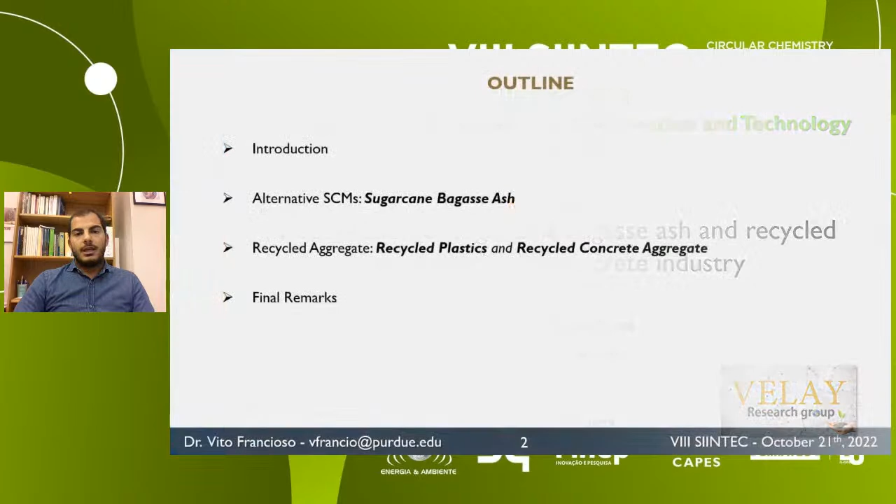Of course, there is not much time to talk about everything that I did during my PhD. I will just talk about 3 studies, but let me know, interrupt me anytime, ask me questions if something is not clear. So this is the outline for today's presentation. I will give a brief introduction, and then we will see the utilization of sugarcane bagasse, and then recycled aggregate, recycled plastics, and recycled concrete aggregate, and then some final remarks.

Cementitious materials are indispensable to our social and economic development. Concrete is perhaps the most eco-friendly, versatile, low-cost, and durable construction material. Its embodied carbon is 10 to 20 times lower than that of glass and steel. So where does the environmental impact come from? Well, with over 30 billion tons of global annual production, concrete is the most used artificial material in the world.

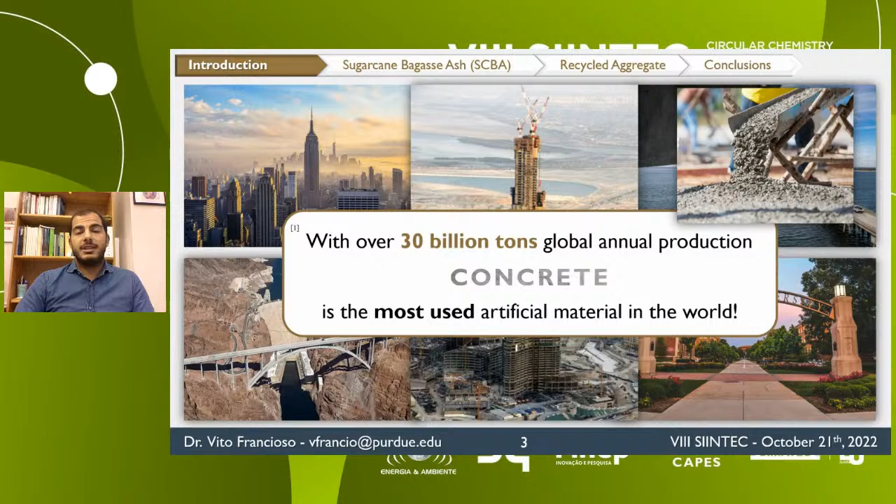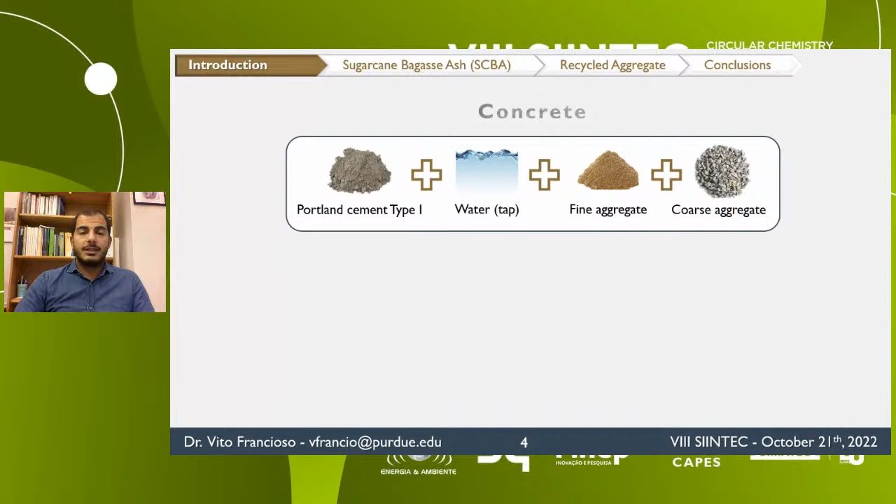Concrete is a composite material made by mixing together cement, water, and aggregate. A significant contribution to the impact that the construction sector has on the environment is due to the cement industry. In fact, the production of cement is responsible for 8% of the global CO2 emissions. This comes from the fuel necessary for the production of the clinker, for the calcium carbonate decomposition, and also for the transport. Besides cement, aggregates have a great impact on the sustainability of construction, since they represent around 60 to 70% of the volume of the concrete.

Each year, approximately 8 billion cubic meters of aggregates are used in constructions, and the majority of them come from raw materials, consequently contributing to the depletion of natural resources.

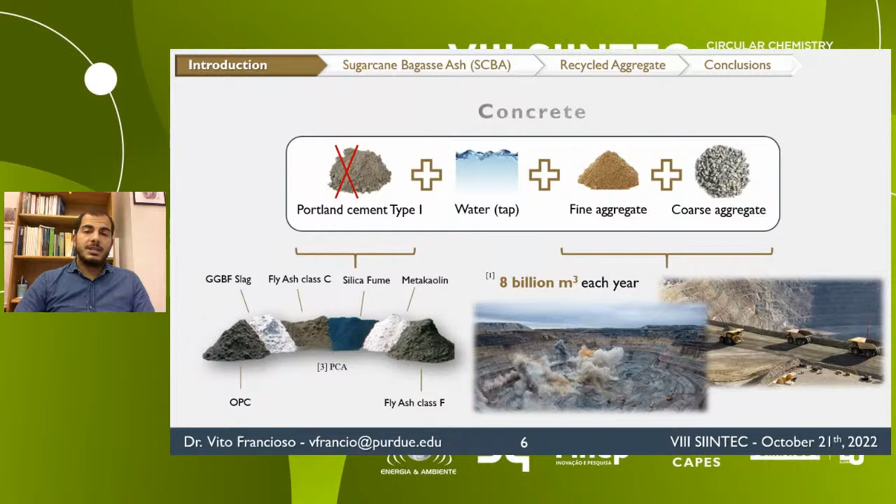Now, there are different approaches to reduce the environmental impact of cementitious materials. One approach is reducing the cement content, for instance, substituting it with supplementary cementitious materials. SCMs are natural materials or industry byproducts used as admixtures in concrete to make up part of the cementitious component.

Another approach is replacing natural aggregate with recycled aggregates, such as recycled concrete aggregate and recycled plastic, which can contribute to reducing both the natural abiotic depletion and waste generation.

Furthermore, we could improve the sustainability of the cementitious composite, enhancing their durability and providing the material advanced properties that may have a positive proactive effect during service life. For example, titanium dioxide nanoparticles have been found to provide cementitious composites with photocatalytic properties that may reduce different pollutants concentration from the environment while enhancing their strength.

I won't be able to talk about the titanium dioxide today, but we have used it in many of our studies, and we have used it in conjunction with recycled concrete aggregate as well.

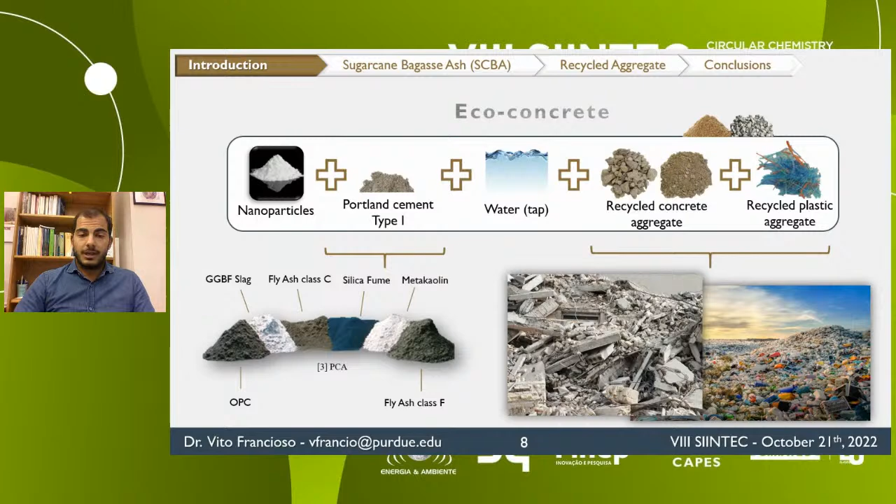So we have seen that there exist different approaches, but how do they work synergistically? For example, if I replace natural aggregate with a recycled aggregate, how will their performance change?

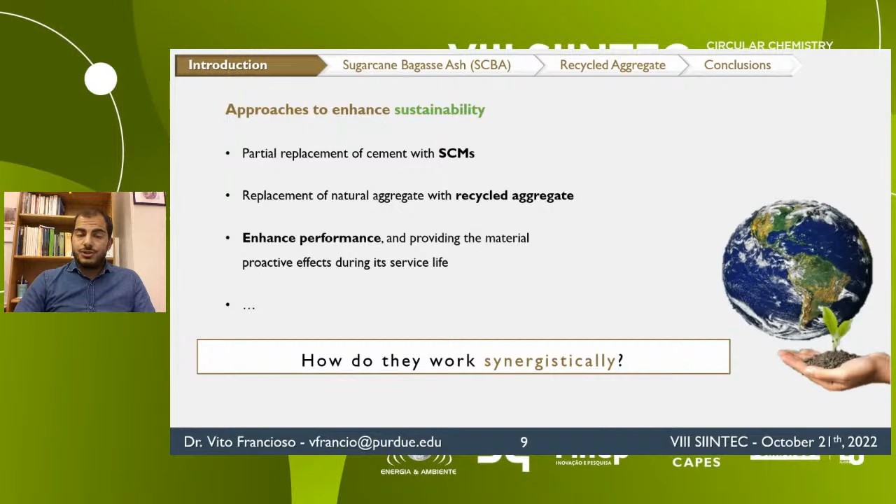These slides summarize the studies that I will be presenting today. I will discuss first the utilization of sugarcane bagasse ash and how curing temperature can change the environmental impact in mortars. Then I will be assessing the impact of recycled plastics on the high temperature resistance of mortars. And finally, I will evaluate the influence of the ambient condition on the thermal conductivity of composites that contain recycled concrete aggregates. For each of these studies, I will make a brief introduction and then explain my motivation and provide my hypothesis for the studies.

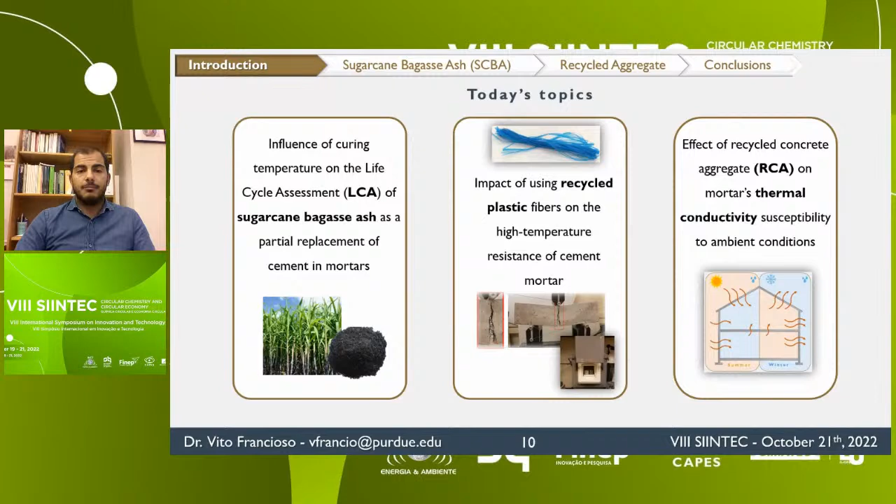So let's start with the first study, the influence of curing temperature on the life cycle assessment of sugarcane bagasse ash as a partial replacement of cement in mortars. This research has been submitted in a paper this month, so it's very fresh.

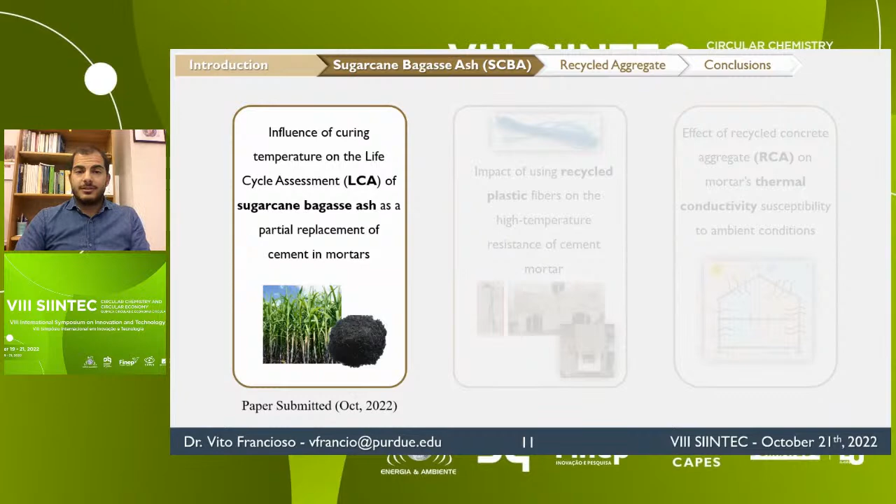Now, currently, one of the most used supplementary cementitious materials is coal fly ash, a byproduct generated in power plants. However, fly ash may become a limited resource due to the dismantling of coal-based power plants in developed countries. Thus, there is a need to find new products that can replace the fly ash in concrete production to lower the amount of cement and its corresponding CO2 emissions.

Recent attention has been shifted to the utilization of sugarcane biomass ashes. An example of these biomass ashes is sugarcane bagasse ash, which is a biomass waste resulting from sugarcane bagasse combustion for electricity production. Sugarcane bagasse is a byproduct of the sugarcane industry in sugar and ethanol production.

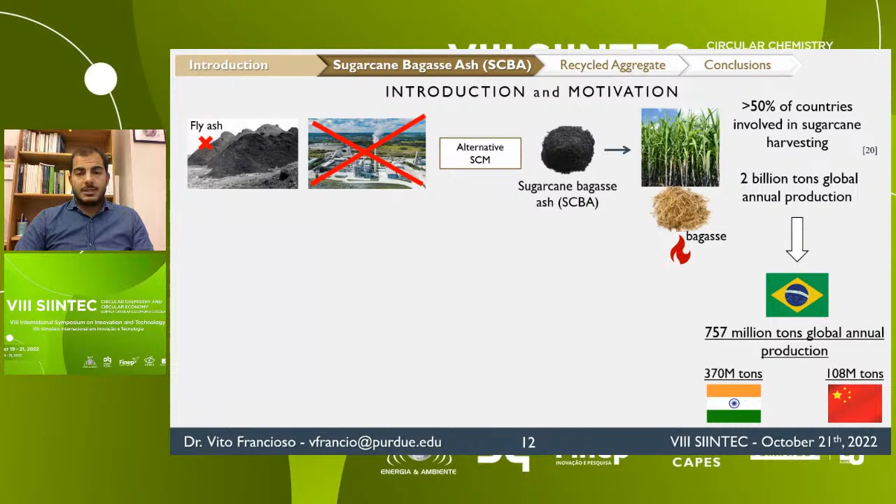More than 50% of the countries are involved with sugarcane crops, totaling an annual global production of about 2 billion metric tons, with Brazil being the world's undisputed leader with 757 million tons of sugarcane production in 2020, followed by India with 370 million tons, and China.

Now, as the production increases, the amount of ashes generated will also increase, contributing to the ongoing issue of biomass waste management. These ashes are often disposed of in landfills without any regulation and control. However, research has demonstrated that they can be used as a partial cement replacement for the production of mortars and concrete with acceptable strength and durability, which may also increase the sustainability.

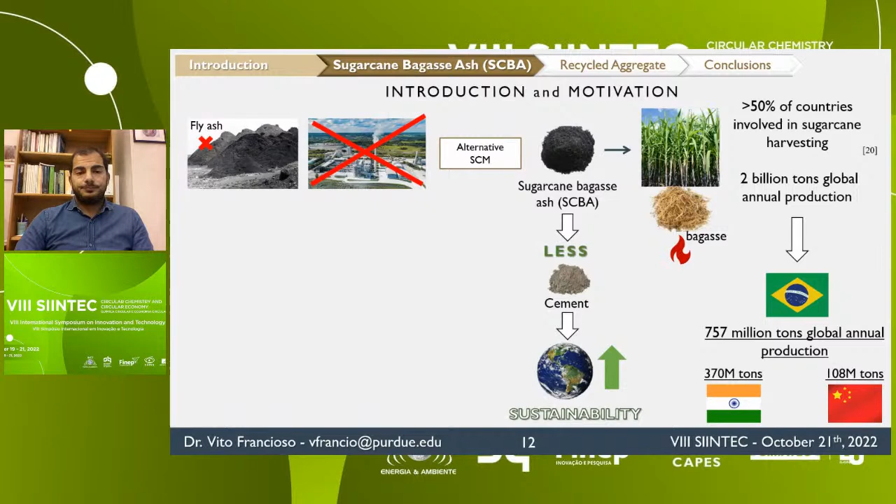Previous studies show that curing temperature influences the effect that biomass ashes have on compressive strength of cementitious composites. If the temperature changes the effect of these ashes on strength, the cement content needed to achieve a given performance will also change. Then, what are the real savings of using bagasse ash, or biomass ash, in terms of cement reduction as a function of the curing temperature, right?

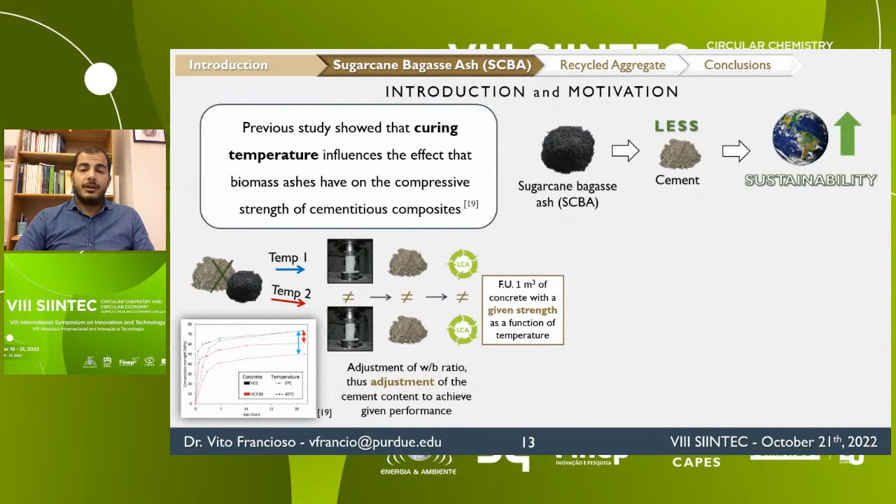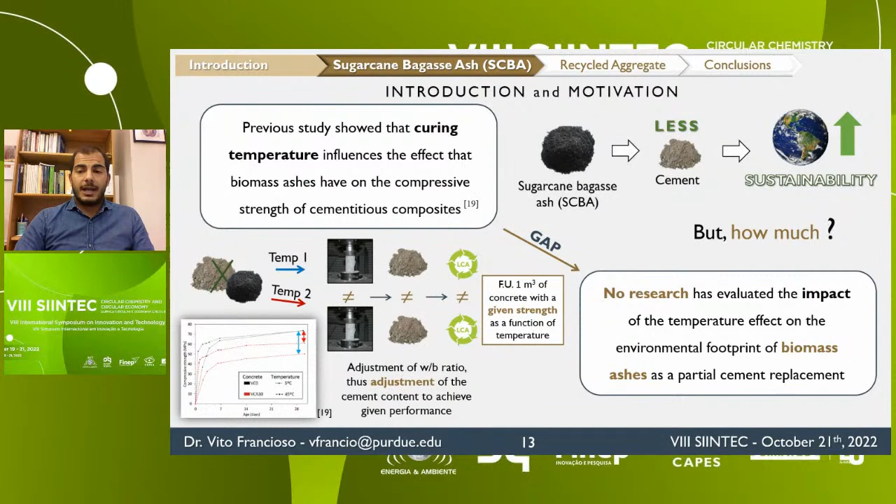We need to compare the samples with the same performance to make a fair comparison. So we realized that no studies evaluated before the impact of the curing temperature on the environmental footprint of using bagasse ashes on cementitious composite.

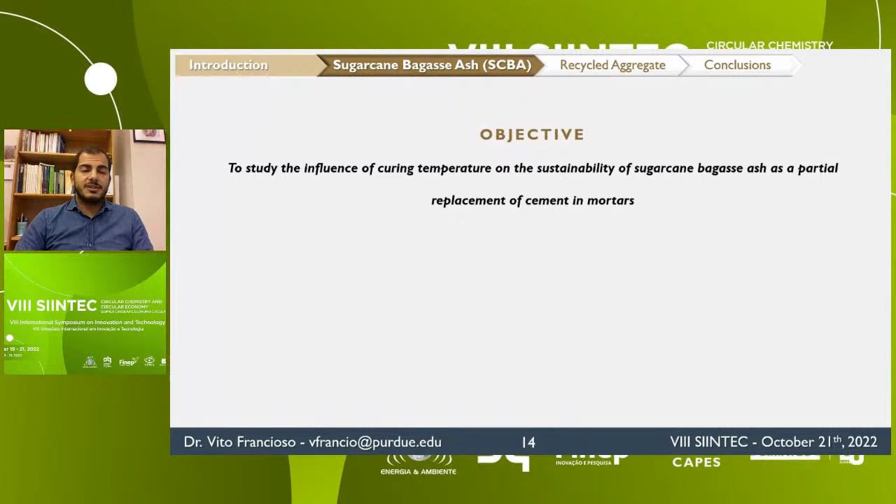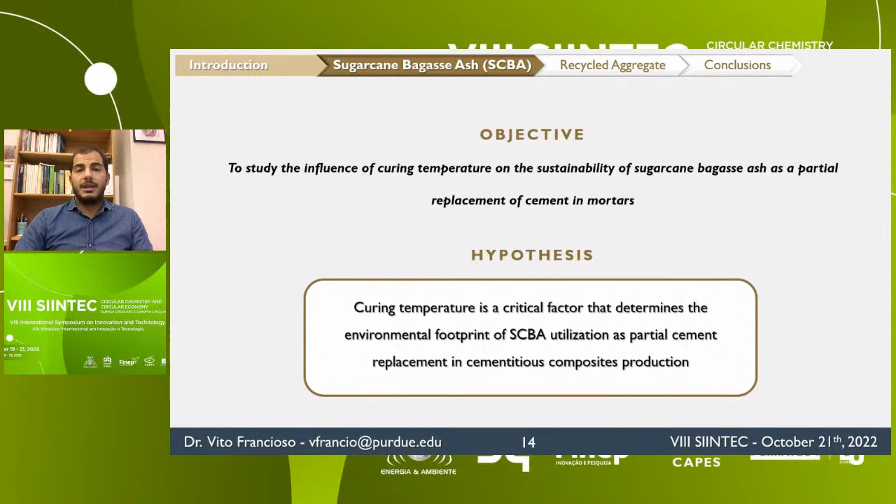The objective of this research was to study the influence of curing temperature on the sustainability of sugarcane bagasse ash as a partial replacement of cement in mortars. My hypothesis is that curing temperature is a critical factor that determines the environmental footprint of sugarcane bagasse ash utilization as a partial replacement in cementitious composite production.

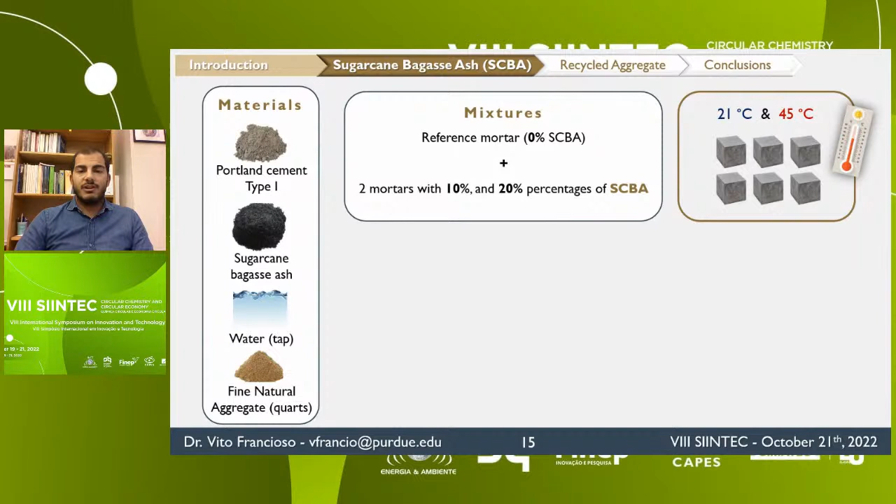For these studies, I designed 3 mixtures: a reference mixture without sugarcane bagasse ash, and 2 mortars with 10% and 20% replacement of cement with sugarcane bagasse ash. These percentages were based on previous research, while the curing temperatures chosen were 21 degrees Celsius and 45 degrees Celsius. For the experimental campaign, I performed compressive strength tests, physical and chemical characterization of the ashes, and finally a life cycle assessment.

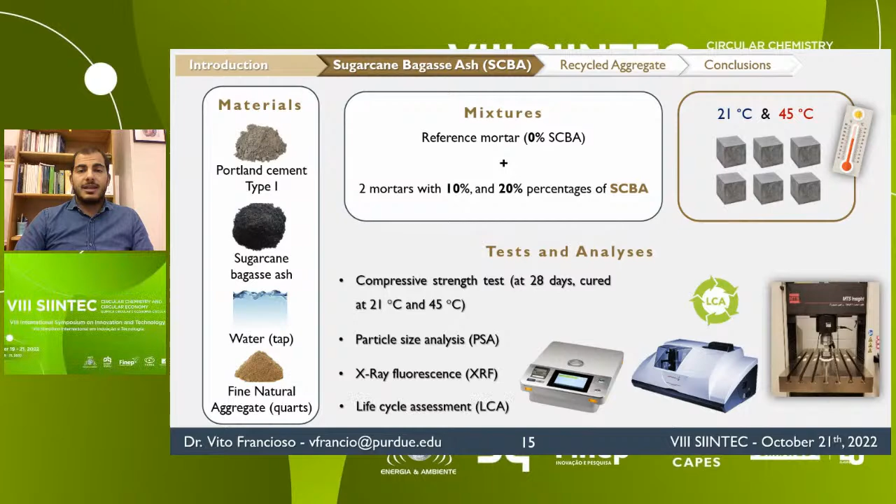Results show that the replacement of cement with sugarcane bagasse ash at standard curing temperature, 21 degrees Celsius, had a slightly negative effect on the compressive strength. Nevertheless, the difference compared to the reference mortar cured at the same temperature was lower than 8% in both replacements, 10 and 20%.

However, when the samples were cured at a higher temperature, the mortars with sugarcane bagasse ash exhibited an increase in compressive strength, over 20% in both cases compared to the plain mortar cured at the same temperature. Thus, the results suggest that the curing temperature modifies the effect of sugarcane bagasse ash on the mortar's compressive strength.

From here, I performed a secondary experimental campaign to estimate the variation of cement content required to obtain a compressive strength equal to that of the reference mortar without sugarcane bagasse ash, depending on the ash replacement level. The results of this additional experimental campaign contributed as an input for the life cycle assessment.

What is a life cycle assessment? LCA is a tool for evaluating the environmental impact associated with a product system throughout its life cycle, and it can be divided into 4 steps.

The first step is the goal and scope definition. The scope of this life cycle assessment was to quantify how curing temperature affects the environmental performance of eco-mortars with different percentages of sugarcane bagasse ash. The system boundary chosen for this study was cradle to gate, from production to the point the material is sold. The functional unit chosen was 1 cubic meter of mortar with the same compressive strength as the reference mixture, the mixture with plain Portland cement and without ashes, cured at the same curing temperature.

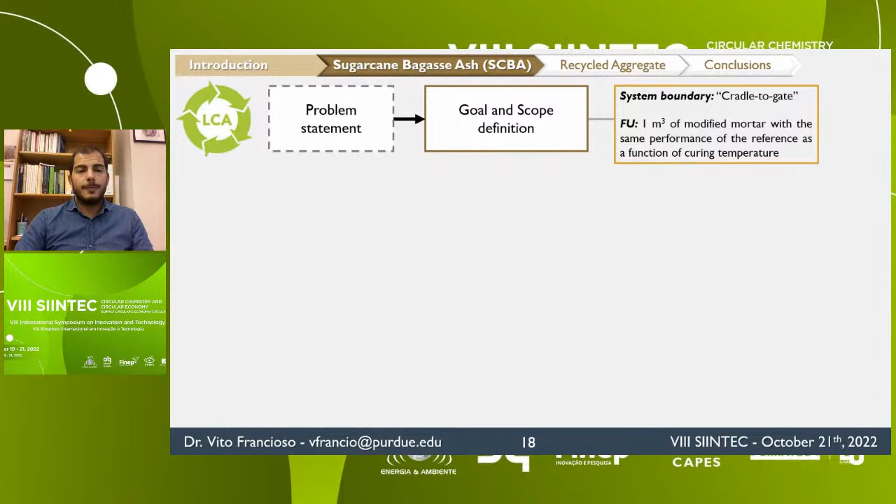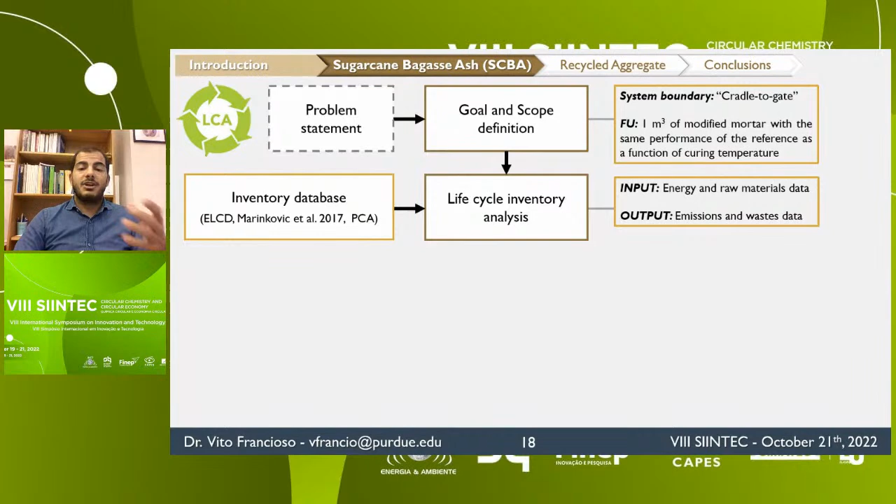The second step in the life cycle assessment is the life cycle inventory. In this stage, input and output data must be identified and allocated for each material production. To help with this, numerous databases have been developed which provide essential inventory data representing the average production and supply conditions for products and services.

The last phase of the LCA is the interpretation of the results obtained from the impact assessment. For these studies, I followed two different approaches: I analyzed the single impact categories, and I also used normalization factors to obtain a single unified index comprising all impact categories.

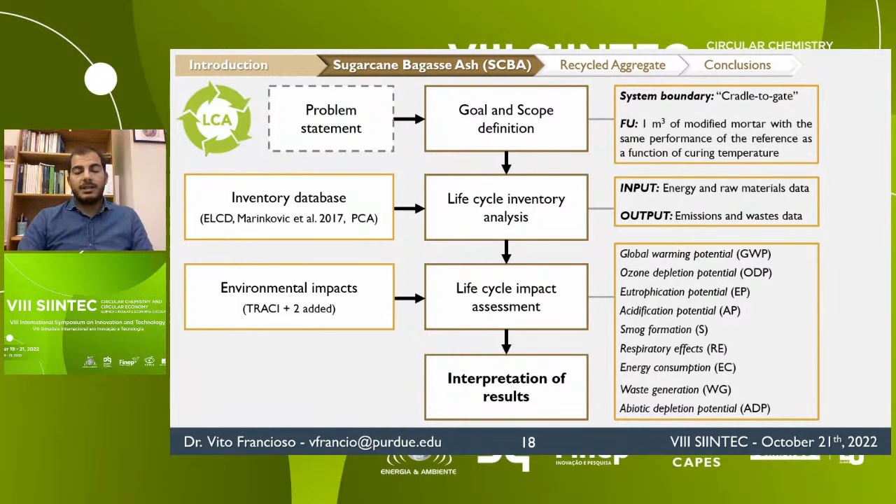The results show that a replacement of about 100 kilograms of cement with sugarcane bagasse ash per cubic meter of mortar produces over 2 times higher reduction in environmental impacts when the curing temperature is 45 degrees, compared to when the curing temperature is lower.

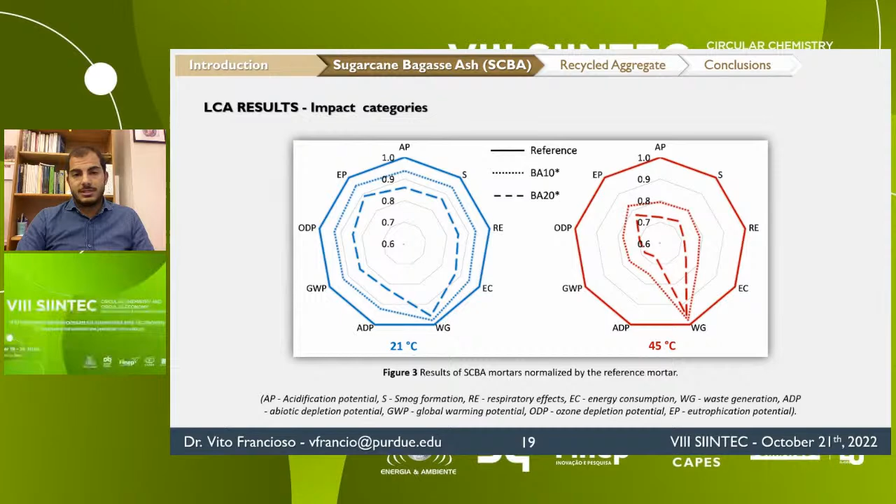The results can also be represented with a single normalized unified index, which accounts for all the impact categories in a single score that is then normalized to its reference. To do this, we use normalization factors, which put each environmental impact in relation to the impacts of society's production and consumption activities.

The results clearly showed that curing temperature is critical when assessing the environmental impact of mortars containing sugarcane bagasse ash. In the case of 20% replacement, the reduction compared to the reference mortar was 14% at 21 degrees and 31% at 45 degrees, more than double.

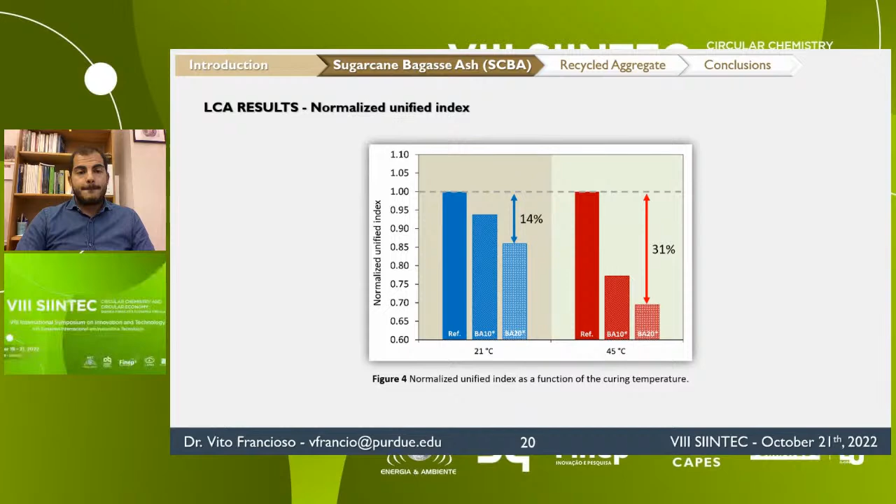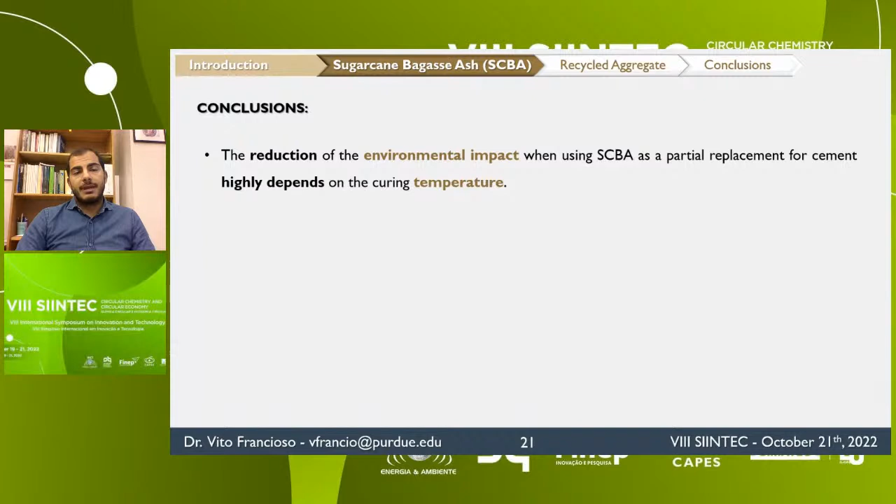We can conclude that the reduction of the environmental impact when using sugarcane bagasse ash as a partial replacement for cement highly depends on the curing temperature. When mortars were cured at 45 degrees Celsius, the use of sugarcane bagasse ash reduced the environmental impact 2 times with respect to the reduction at 21 degrees Celsius.

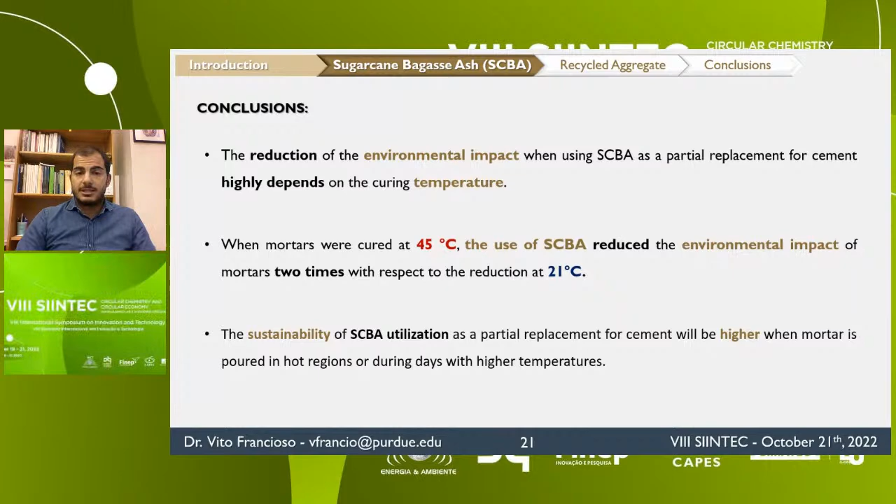The sustainability of sugarcane bagasse ash utilization as a partial replacement of cement will be higher when the mortar is poured in a hot region or during days with higher temperature. Therefore, external curing temperature is an important factor that should be considered when the sustainability of cementitious composites containing sugarcane bagasse ash, but also other biomass ashes, is assessed.

Now let's see some utilization of recycled plastic in cementitious composites, in cementitious materials. This research has been published in the Construction and Building Materials Journal in 2021.

Previous studies have shown that the performance of cementitious composites reinforced with plastic fibers can be enhanced, including its mechanical properties and durability. The plastic fibers can act as a reinforcement and produce a bridging force across the cracks that prevents their propagation. Because of these fibers bridging cracks in the matrix, fiber-reinforced mortars may exhibit significantly higher flexural strength than plain mortar.

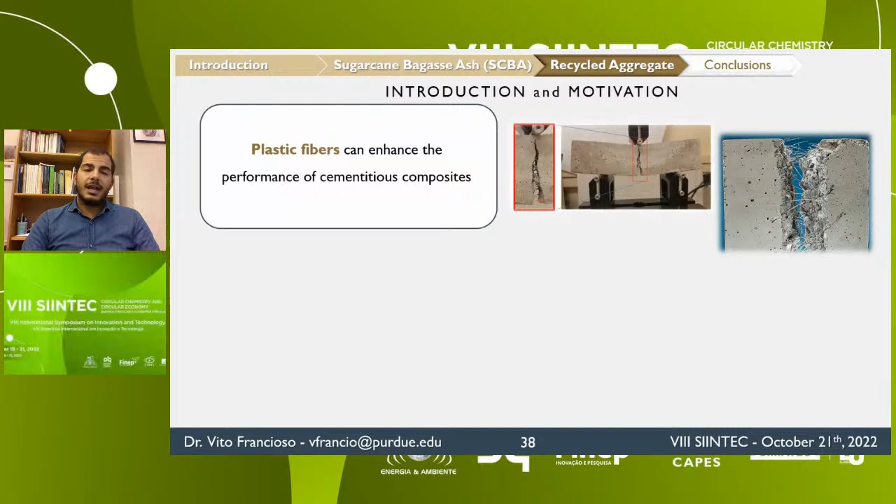Compared to other options such as steel fibers, plastic fibers have a lower carbon footprint, are cost-effective and corrosion-resistant. However, the effect on strength has been reported to be contradictory. It's been observed that the interfacial transition zone (ITZ) between the matrix and the plastic fibers is affected by the smooth surface and hydrophobic nature of the plastic, resulting in poor anchoring.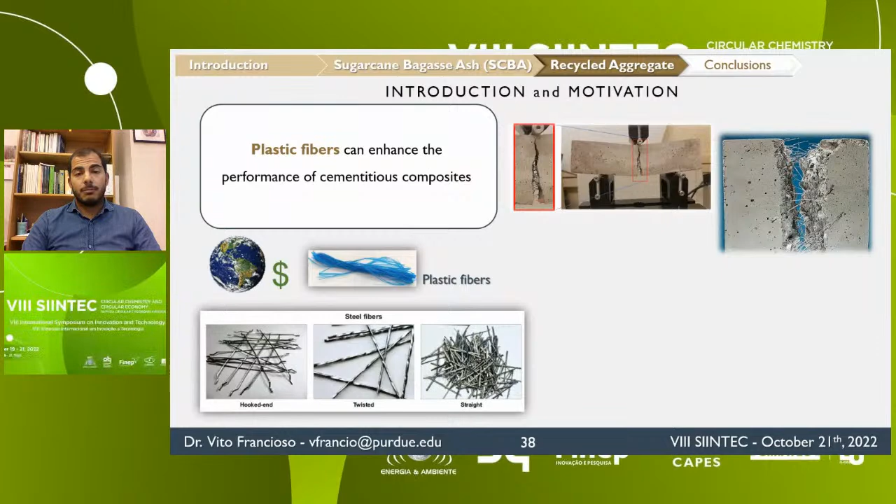Several studies have demonstrated that polypropylene fibers can prevent spalling failure of concrete under compressive loads caused by internal stresses when subjected to elevated temperature. However, the influence of elevated temperature on the flexural performance of recycled plastic fiber reinforced mortars, and its effect on the interfacial transition zone between the matrix and the recycled fibers, was not deeply investigated.

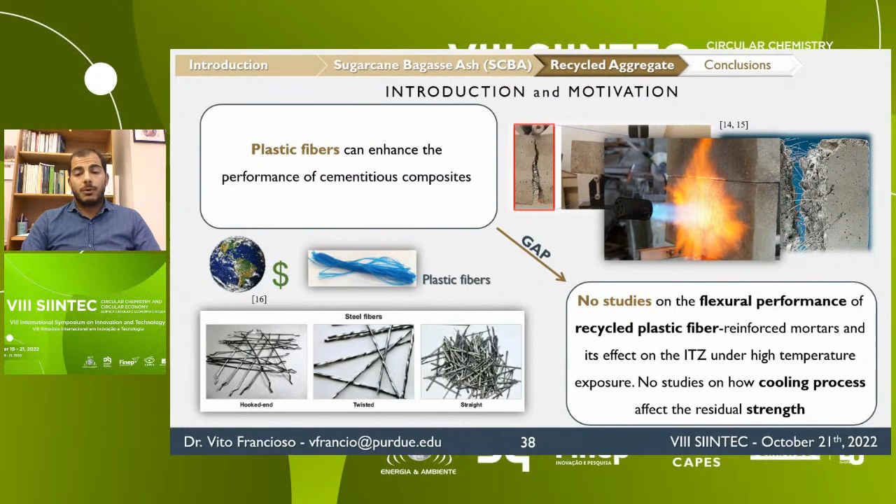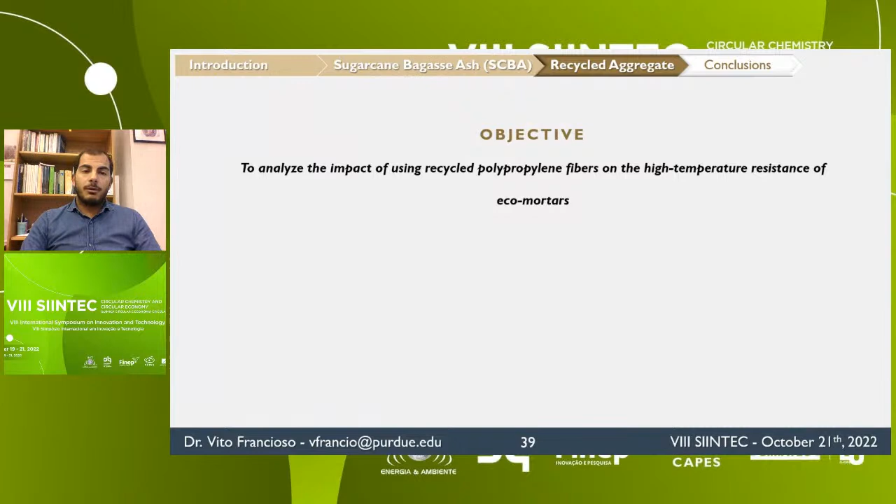Moreover, no studies were found on the possible effects of cooling processes on the residual strength of these eco-mortars. The objective of this study was to analyze the impact of using recycled polypropylene fibers on the high temperature resistance of eco-mortars. My hypothesis is that exposure to elevated temperature will affect the interfacial transition zone bonding between the matrix and the recycled fibers, impacting the residual strength of the eco-mortars once cooled down.

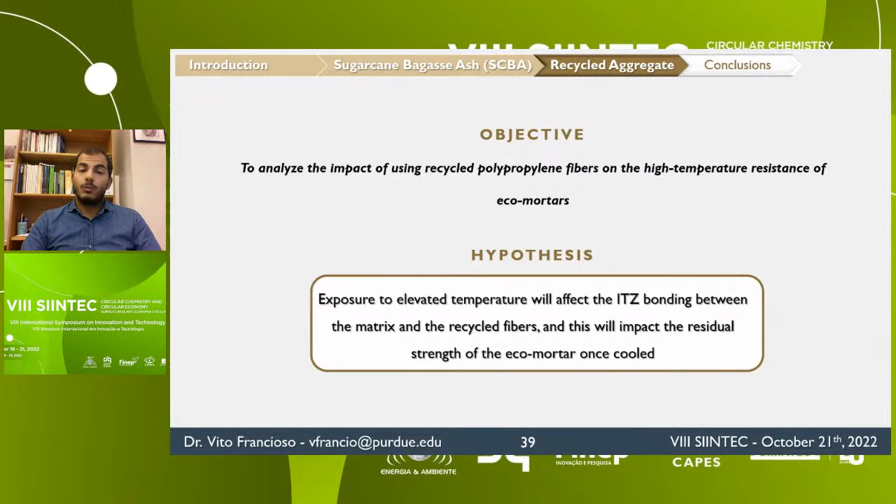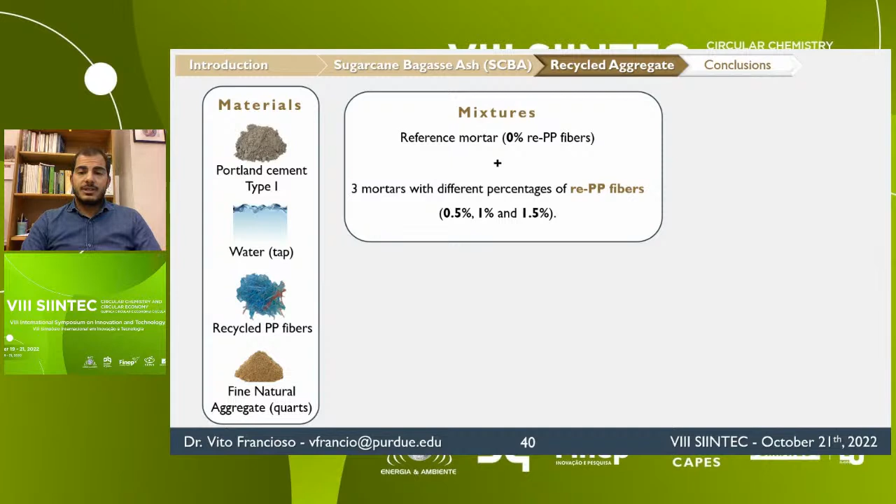For this study, I designed 4 mixtures: a reference one without any fibers, and 3 mortars with different percentages of recycled polypropylene fibers: 0.5%, 1%, and 1.5%. The flexural and compressive strength tests were performed at 28 days before and after exposure to elevated temperatures.

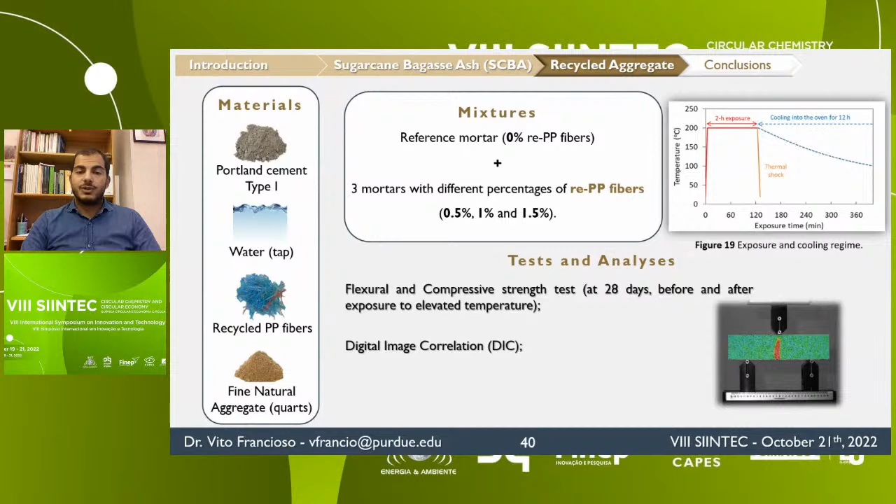Besides, digital image correlation (DIC) technique was adopted to study the evolution of crack propagation and strain distribution in the specimen during the 3-point bending test. Finally, the interfacial transition zone was inspected by means of a digital optical microscope.

The samples were exposed for 2 hours at 200 degrees Celsius, and then tested after 2 different cooling regimes: thermal shock, meaning the samples were tested right after the 2 hour exposure, and then after 12 hours cooling in the oven.

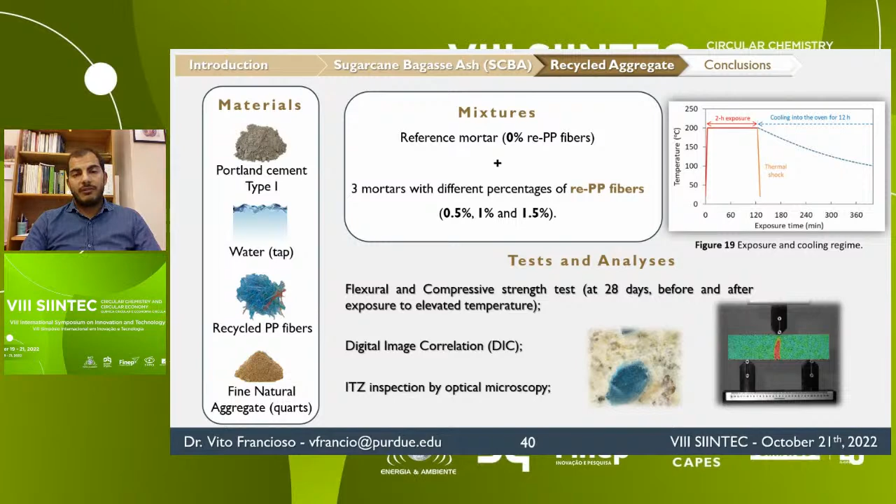On the other hand, slow cooling increased the flexural strength compared to samples tested under standard conditions. This enhancement is specifically higher in samples with polypropylene fibers. Since the matrix is the same, these results suggest that the bonding between the fibers and the matrix was enhanced after the high temperature exposure of slow cooling.

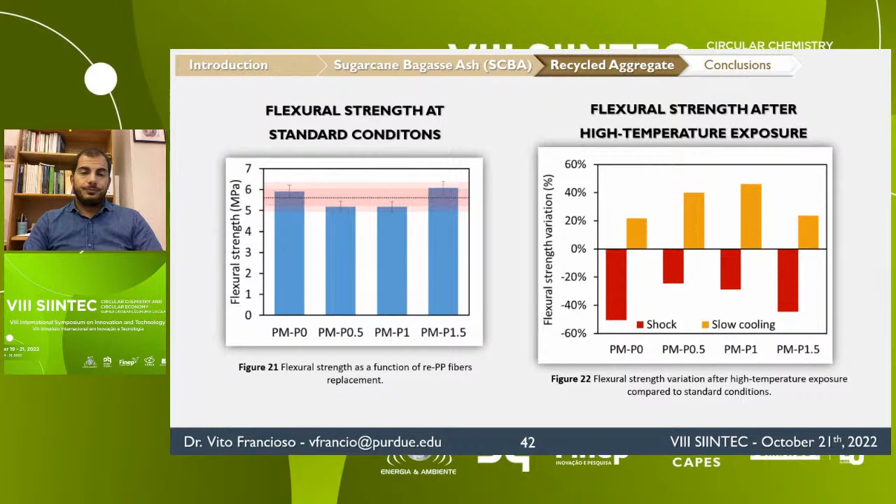Even though the recycled fibers did not remarkably affect the flexural strength, they have been found to increase the maximum strain before ultimate failure and provided the composite material a secondary flexural strength. So to evaluate the influence of exposure on the fiber bonding, I analyzed this secondary strength, since this strength is only related to the amount of fibers and the bonding between the fibers and the matrix.

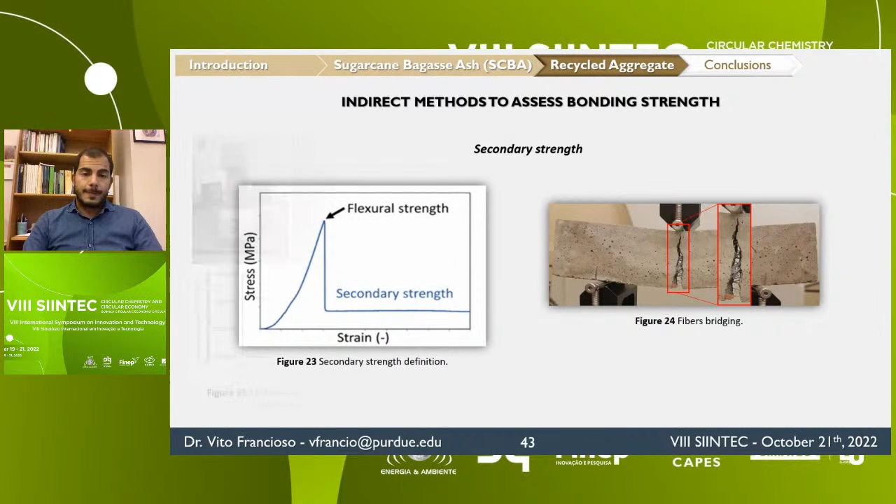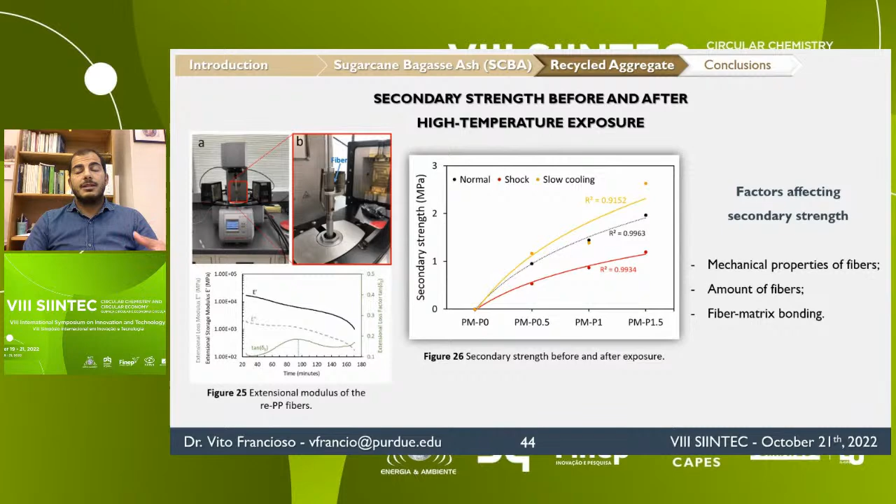Nevertheless, in samples tested after slow cooling, the fibers could recover all their strength and contribute again to the strength of the composite. Not only that, it improved, suggesting an improvement in the fiber matrix bond.

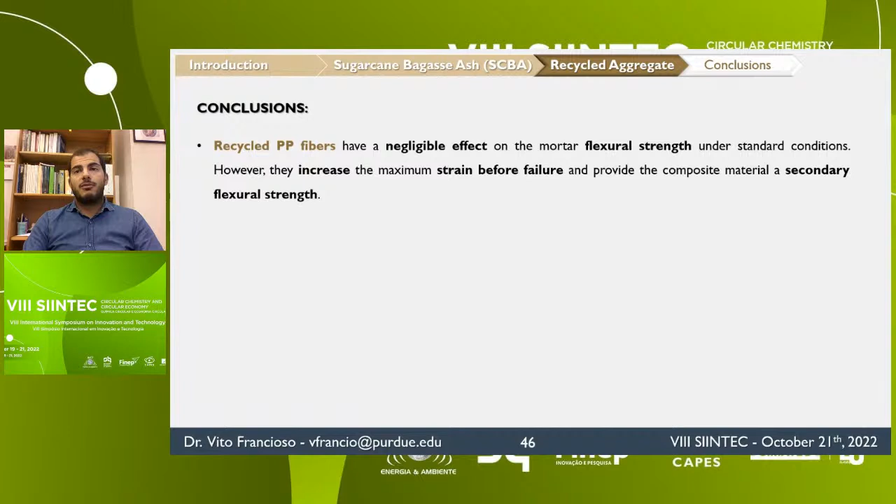So we can then conclude that the recycled polypropylene fibers have a negligible effect on the mortar flexural strength under standard conditions. However, they increase the maximum strain before failure and provide the composite material a secondary flexural strength.

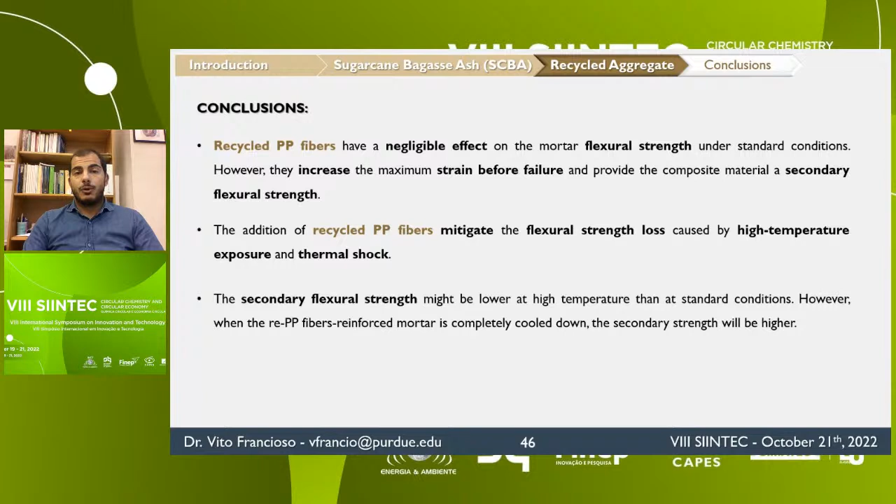The addition of recycled polypropylene fibers mitigates the flexural strength loss caused by high temperature exposure and thermal shock. The secondary flexural strength might be lower at high temperature than at standard condition. However, when the recycled polypropylene fiber reinforced mortar is completely cooled down, the secondary strength will be higher.

And finally, after 200 degrees Celsius temperature exposure for 2 hours, the polypropylene fibers can penetrate the pore network, enhancing the adhesion between the fibers and the mortar matrix after they are cooled down.

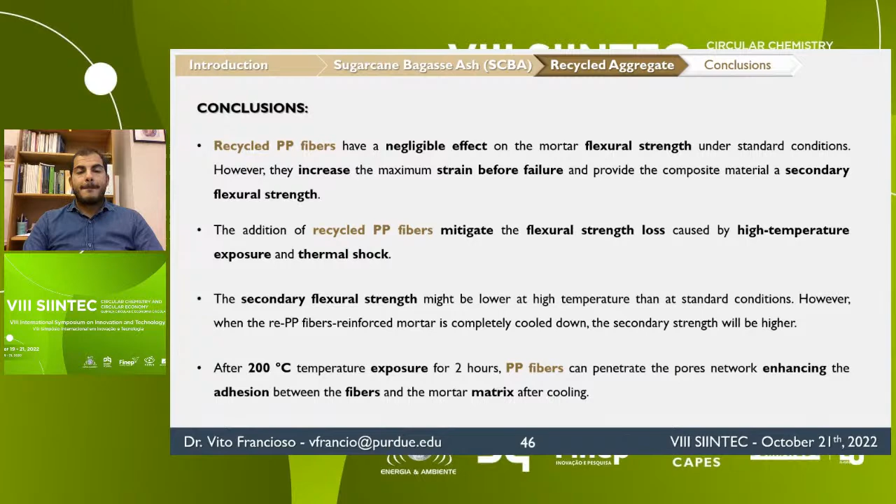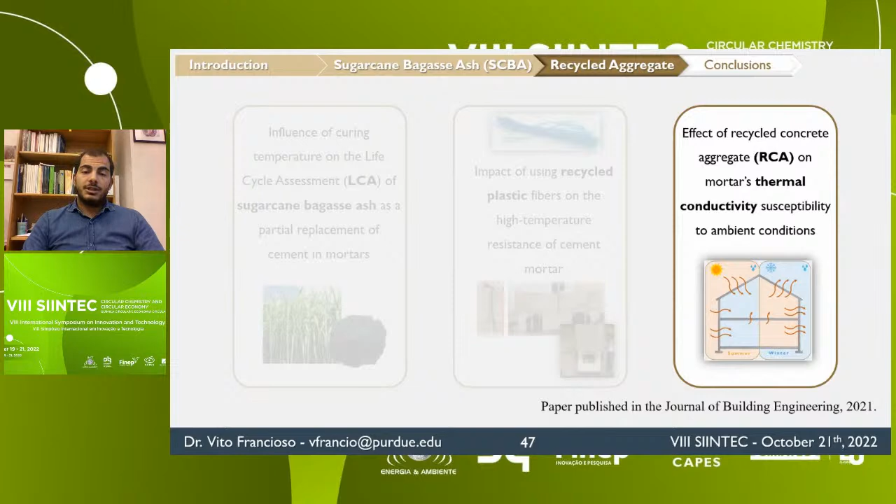Finally, we are going to see the effect of recycled concrete aggregate on the mortar's thermal conductivity susceptibility to ambient conditions. This research has also been published in the Journal of Building Engineering in 2021.

Now, the building and construction sector is responsible for 39% of the global energy-related carbon emissions. 28% of this comes from building operation, HVAC, and power. Therefore, enhancing the thermal insulation capacity of cementitious composites used in building construction might reduce the energy consumption of buildings during their service life.

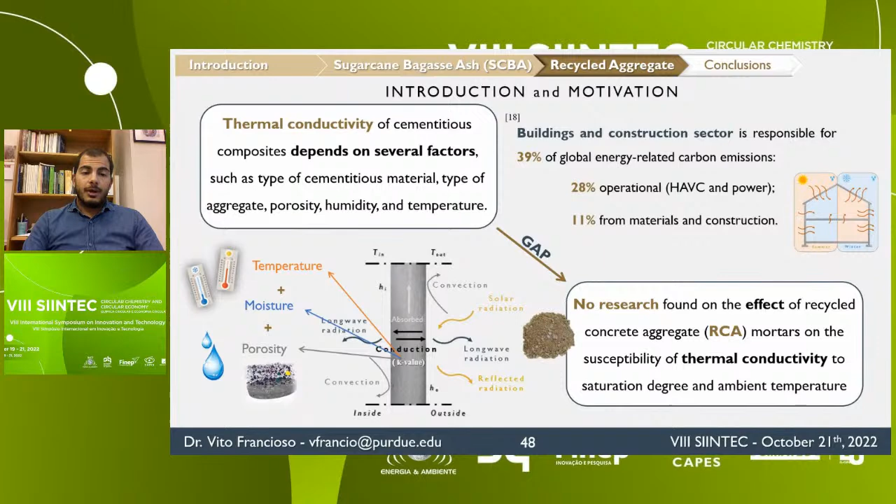It is known that the thermal conductivity can be reduced by replacing natural aggregate with recycled concrete aggregate, which has a lower thermal conductivity. However, no research was found on the effect of recycled concrete aggregate on the susceptibility of the thermal conductivity to saturation degree and ambient temperature.

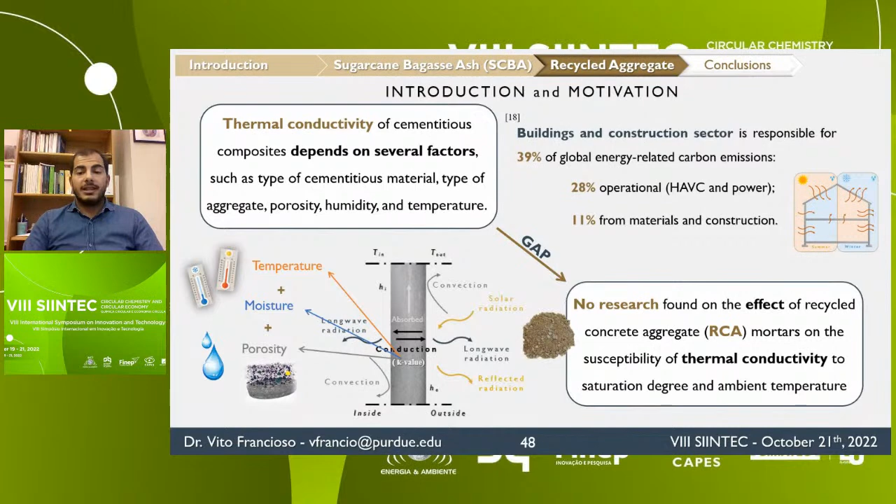Why is it important? It is important because understanding these effects is crucial to assess the actual environmental impact during the service life as a part of the building component.

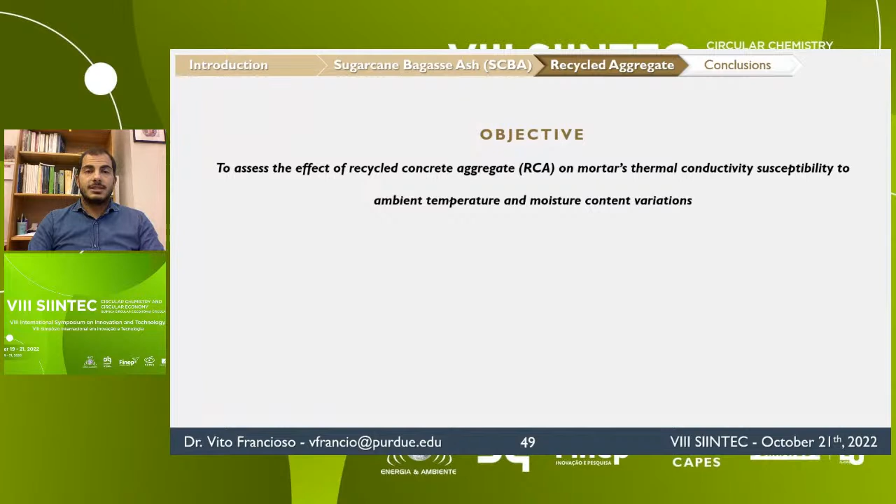So the objective of this study was to assess the effect of recycled concrete aggregate on mortar's thermal conductivity susceptibility to ambient temperature and moisture content variation.

The hypothesis is that the higher porosity due to the utilization of recycled concrete aggregate may change the susceptibility of thermal conductivity of the recycled composite exposed to different ambient temperatures.

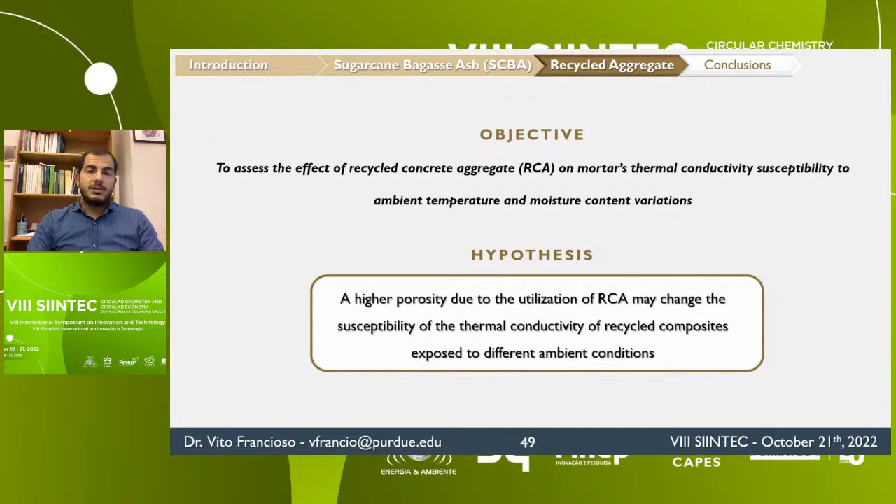Here I designed 4 mixtures with 0, 25, 50, and 100% of recycled concrete aggregate. However, only 3 of them were selected for assessing the thermal conductivity, while the other one, the 25% replacement, was used to validate the model that I will present later.

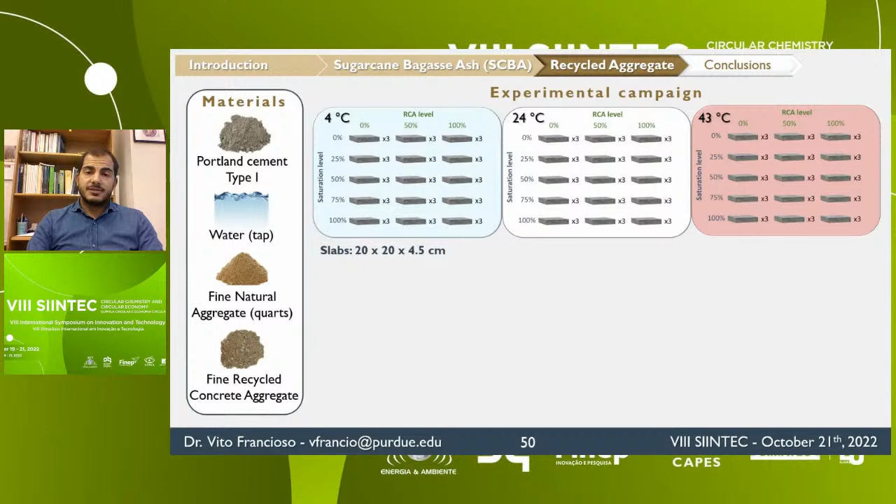So prismatic specimens were cast for flexural strength and compressive strength tests, and slab specimens were cast for thermal conductivity evaluation. A total of 135 thermal conductivity tests were performed here.

Each sample was tested at 3 different ambient temperatures, 4, 24, and 43 degrees Celsius, as per the RILEM standard. Also, 5 different saturation degrees were studied, from dry to fully saturated condition.

The density and the permeable porosity were also determined, and finally I developed an equation which allows obtaining the thermal conductivity as a function of different variables that we will see later.

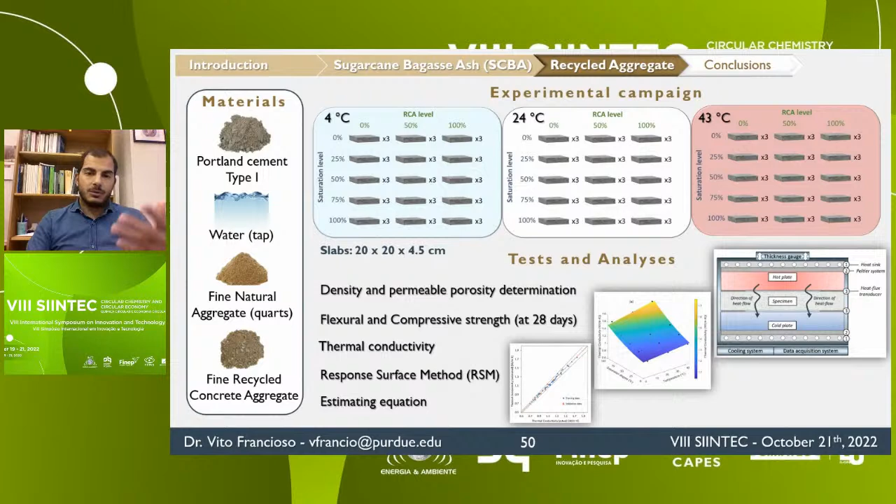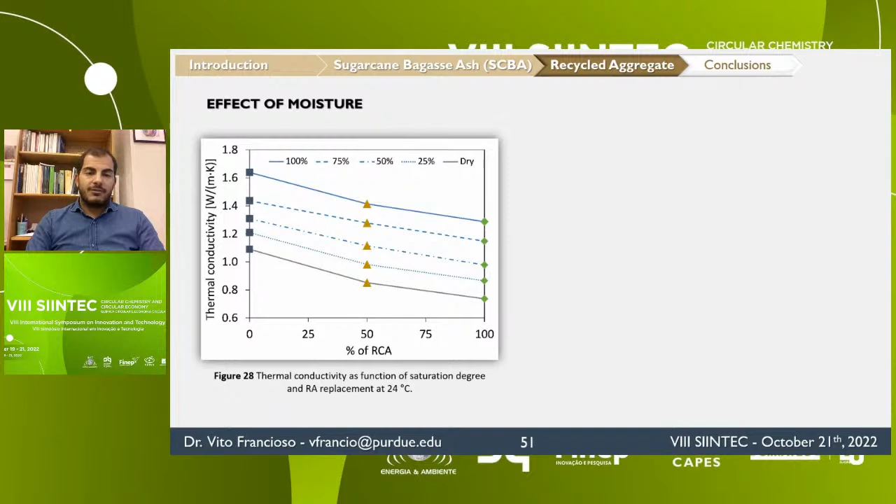Figure 28 shows the thermal conductivity as a function of recycled concrete aggregate for each saturation level. The higher the recycled concrete aggregate replacement, the lower the thermal conductivity, as expected. Also, the higher the saturation level, the higher the thermal conductivity.

However, more importantly, if we observe the variation of thermal conductivity between the dry and saturated state, we see that the higher the permeable pore space, the higher the variation. So the higher the recycled concrete aggregate replacement, the higher will be the variation in thermal conductivity between the dry and saturated state.

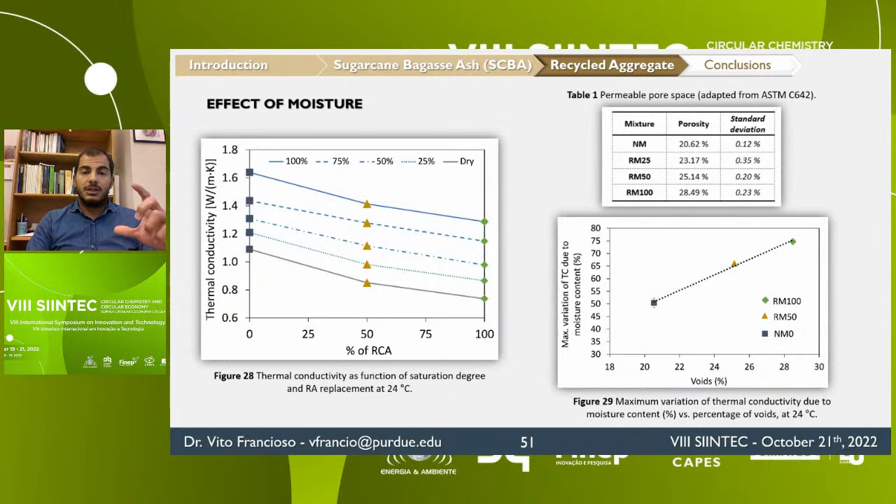Also, we use a response surface method to study the combined effect of saturation degree and ambient temperature on the mortar's thermal conductivity. In these graphs, the points represent the experimental results, while the surface represents the estimation. As we can see, the thermal conductivity increases with both moisture content and temperature. However, the influence of saturation level, the moisture content, is more important.

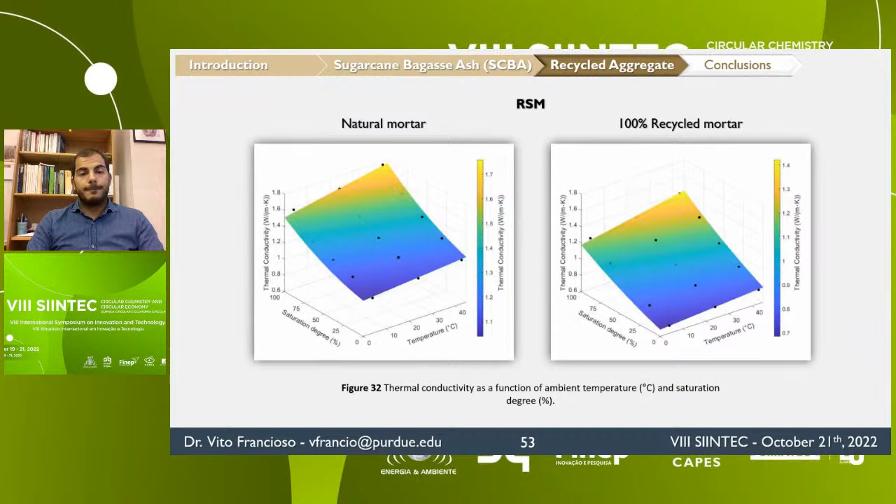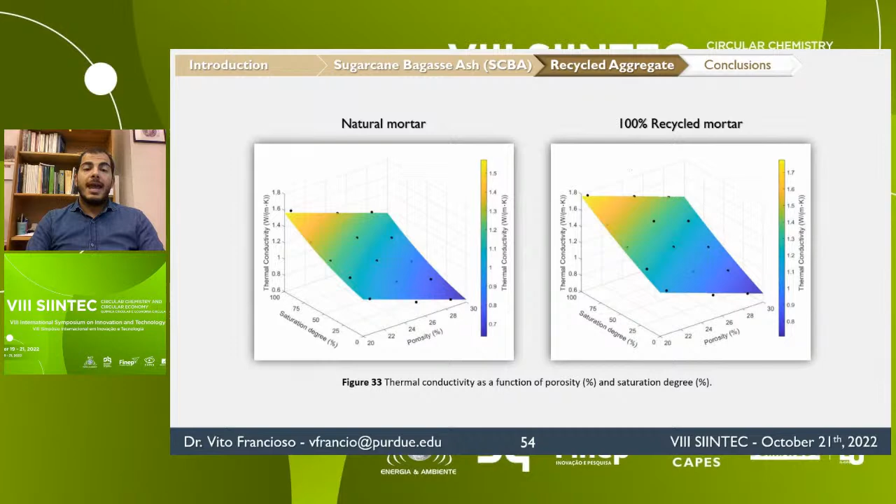The response surface method was also performed to assess the combined effect of recycled concrete aggregate, in terms of permeable pore space, and the saturation degree on thermal conductivity of mortars.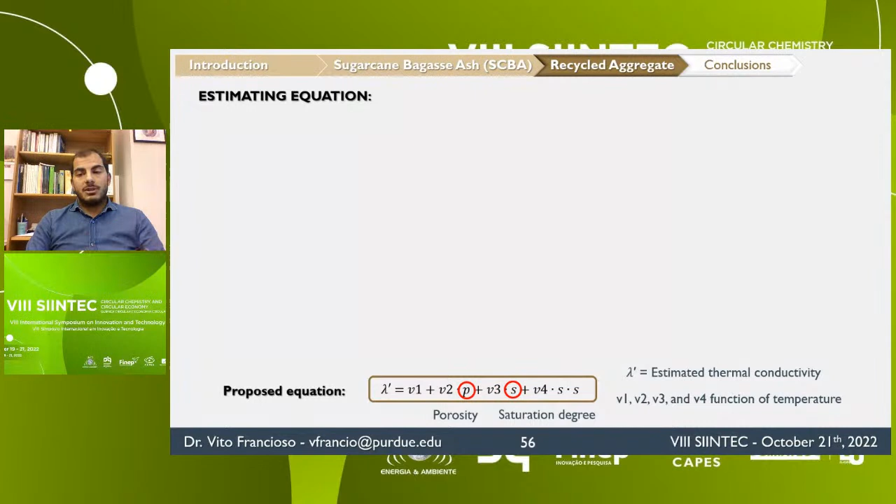Finally, based on the results from the response surface method analysis, where the thermal conductivity was evaluated as a function of porosity and saturation degree for each ambient temperature, I propose an equation that estimates the thermal conductivity of cement mortars as a function of the permeable porosity, saturation degree, and temperature.

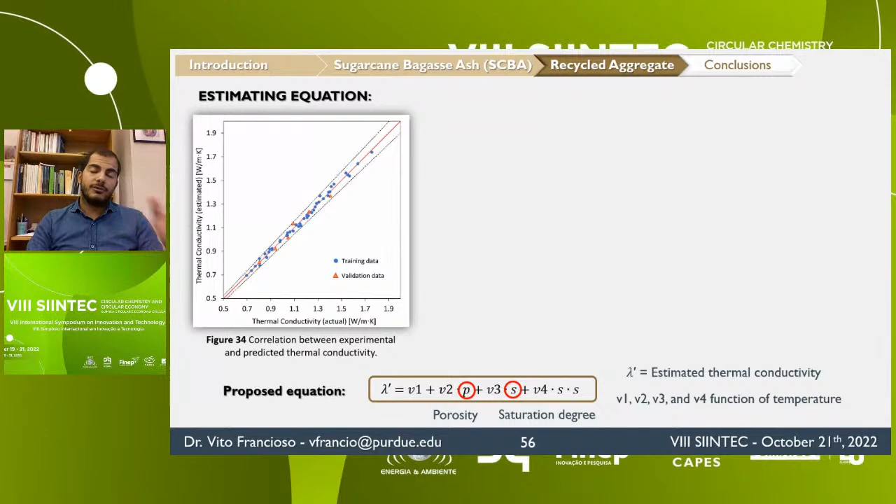As shown in figure 34, a very good agreement was found between the numerical values and the experimental results. The two dotted lines represent an error of plus or minus 5%. Therefore, this proposed model is accurate and able to predict the thermal conductivity of cement mortars, knowing the amount of permeable porosity, saturation degree, and ambient temperature in the range of 4 to 43 degrees Celsius.

The accuracy of this model was also validated through several additional tests, where training data as well as arbitrary values of ambient temperature, saturation degree, and porosity were tested.

And if you remember at the beginning, I said that with the 25% replacement of recycled concrete aggregate, we didn't use it for the thermal conductivity. We actually used those mixtures, those samples, to validate this model, to validate this equation.

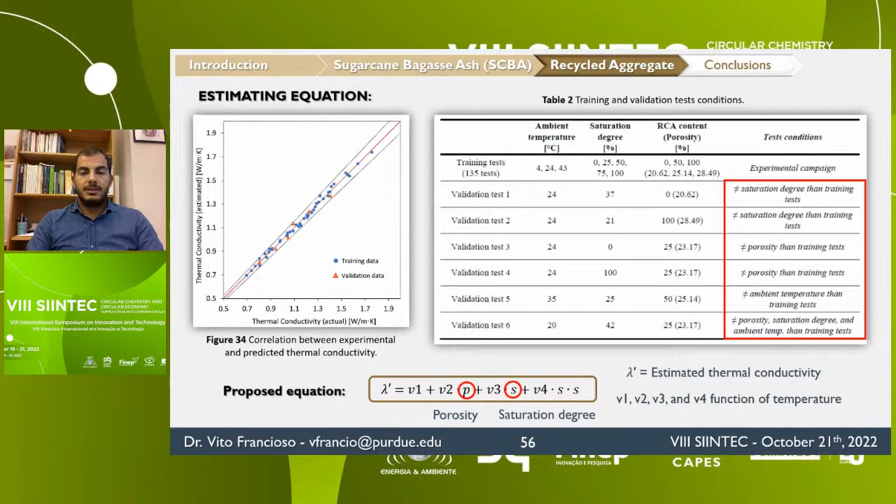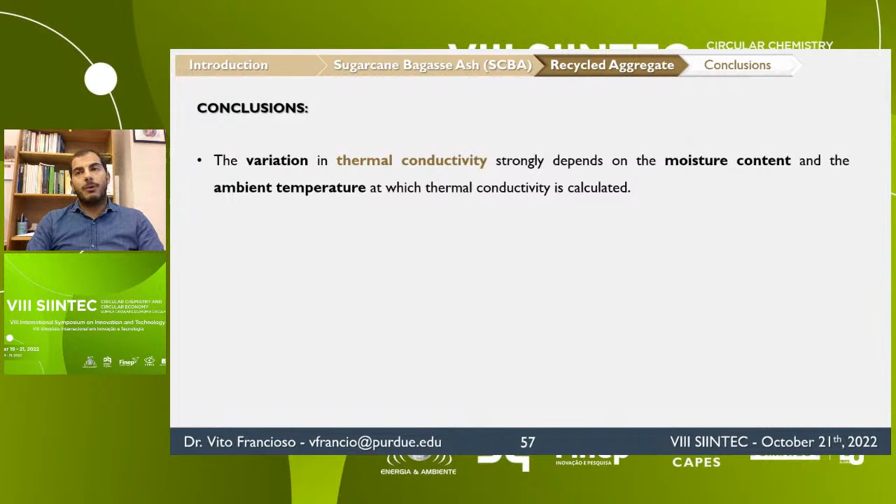So based on the results of this study, we can conclude that the variation in thermal conductivity strongly depends on the moisture content and the ambient temperature at which the thermal conductivity is calculated.

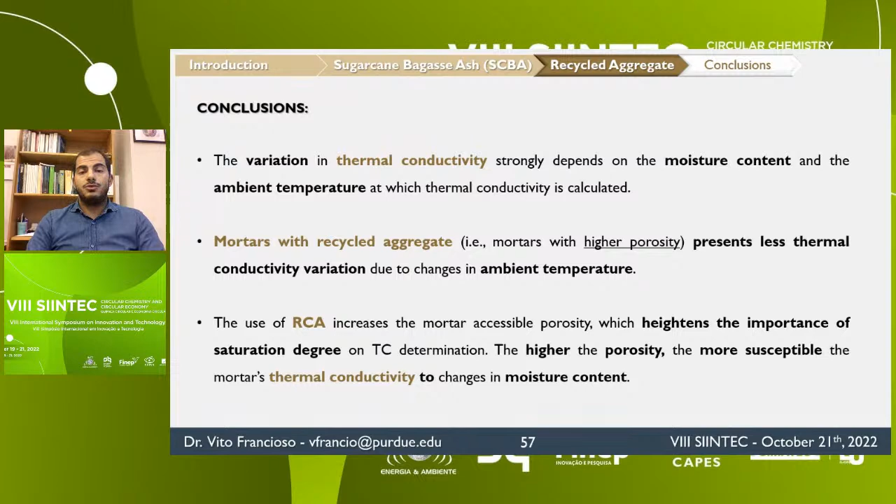Also, mortar with recycled aggregate, such as higher porosity, presents less thermal conductivity variation to changes in ambient temperature. And finally, the use of recycled concrete aggregate increases the mortar's accessible porosity, which heightens the importance of the saturation degree on the thermal conductivity determination. The higher the porosity, the more susceptible is the mortar's thermal conductivity to changes in moisture content.

Now, I have come to the end of my presentation. I will summarize the main conclusions of these studies.

The results of the first study on sugarcane bagasse clearly indicated the sustainability of sugarcane bagasse ash utilization as a partial replacement for cement, but this is also true for other biomass ashes, will be higher when mortar is poured in hot regions or during days with high temperature. Therefore, the external curing temperature is an important factor that should be considered when assessing the sustainability of cementitious composites containing biomass ash.

As we have seen, at higher temperature, 45 degrees Celsius, the use of sugarcane bagasse ash reduced the environmental impact of mortars two times with respect to the reduction at standard curing temperature.

Also, the recycled polypropylene fibers, even though they have a negligible effect on the mortar's flexural strength under standard conditions, so no exposure to high temperature, after exposure to high temperature and cooling, the polypropylene fibers increase the flexural strength as well as decrease the loss of flexural strength in samples after thermal shock. This can be explained as the enhancement of the bond.

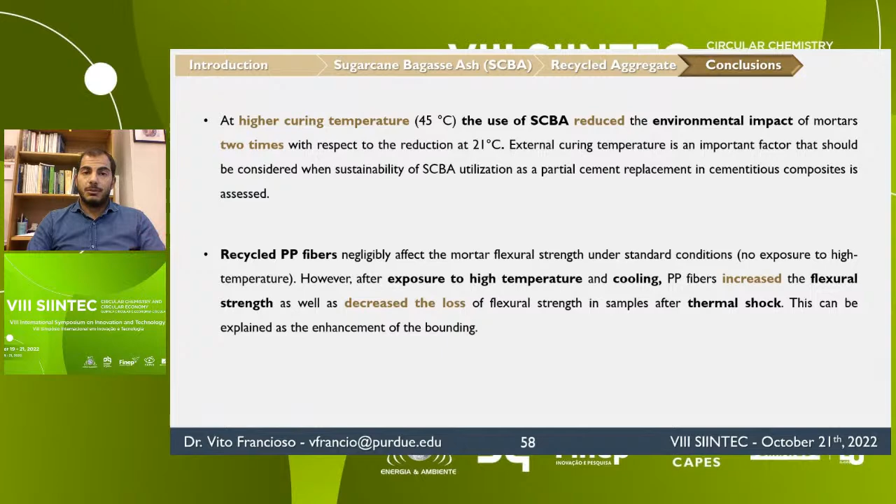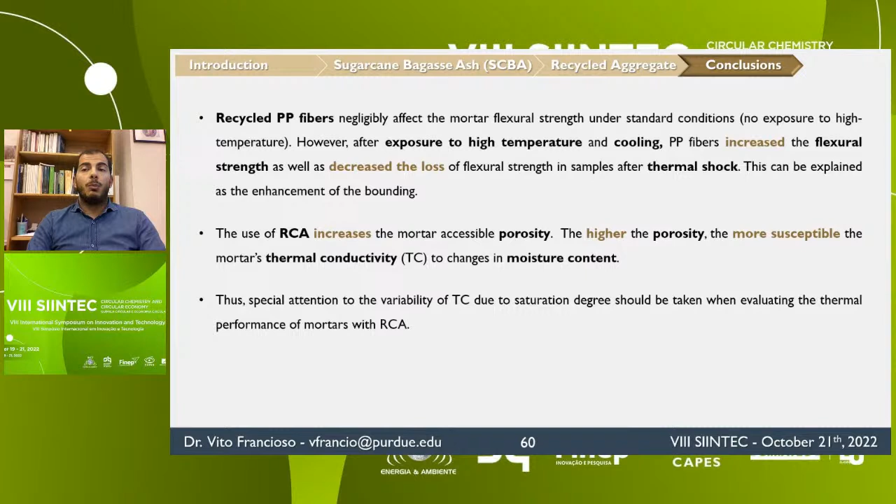Finally, the use of recycled concrete aggregate increases the mortar's accessible porosity, and the higher the porosity, the more susceptible the mortar's thermal conductivity will be to changes in moisture content. Thus, special attention to the variability of thermal conductivity due to the saturation degree should be taken when evaluating

the thermal performance of mortars with recycled concrete aggregate. Also, an equation that accurately estimates the thermal conductivity with an error less than 5% of cement mortar, as a function of the porosity, saturation degree, and ambient temperature, was proposed and validated in one of our studies.

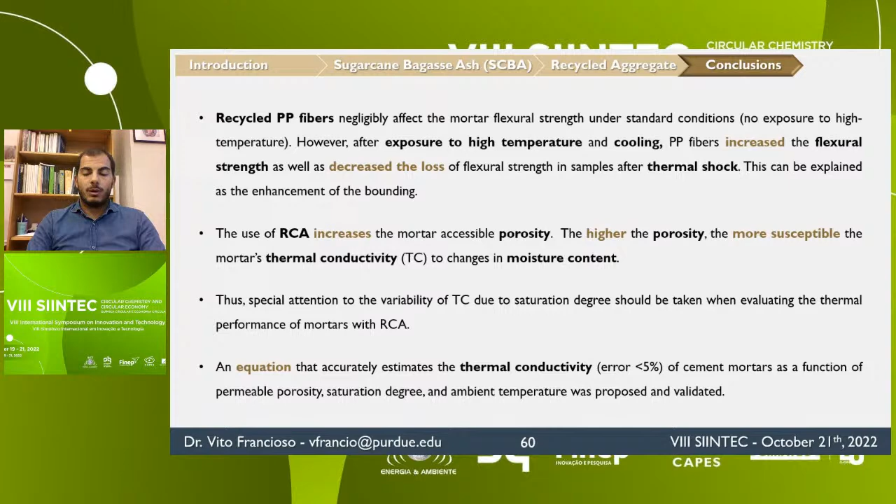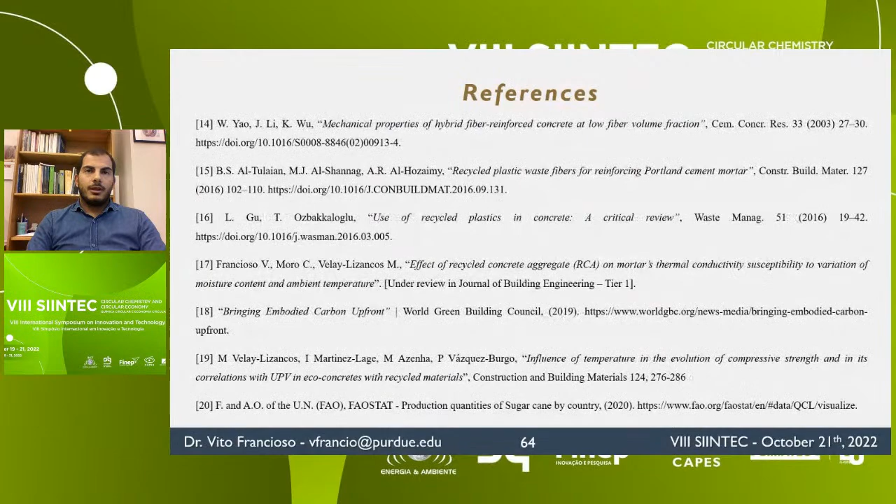These are my references, and this concludes my presentation. Please, if you have any questions—I know I was very fast—but I would be very happy to answer

Can you hear me? Yes, I can. Yes. So thank you so much for your presentation, and I want to know if someone has any questions besides Professor Moisés. He has a question, but I have a question first.

Related to the sugarcane bagasse ash—you said you need a higher temperature for the curing. When you did the life cycle assessment, did you consider the fuel and energy that you needed to use this higher temperature?

In our life cycle assessment, I did not consider that, because what we are stating here is that when you are pouring the concrete or mortars where the ambient temperature is high or higher than the standard, that will improve the performance of your cementitious composites. So that for sure is something that should be done. If we are precasting some elements and curing them at higher temperature to improve their performance, then it makes sense that we should account for the energy

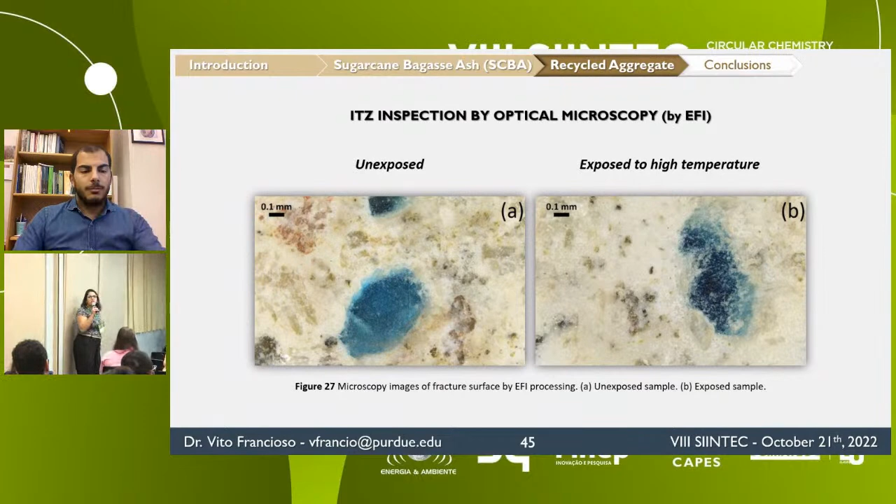Thank you, let me see. Yeah, we can see the picture. Any questions? Can you check YouTube if there are any questions on the channel? Also, Professor Moises, if I can add something on what you were saying before. For example, here, let me check, let me put up a little presentation. Can you see my screen? Not yet. Okay, can you see it now?

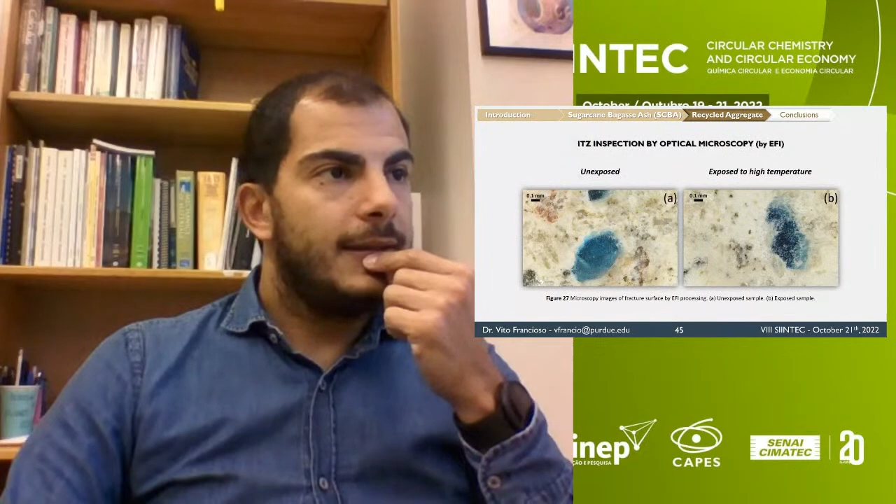Yes, yes. Okay, so the thing is, even though we didn't use any treatment for the fibers, what we observed is that the melting temperature of the fibers was around 170 degrees Celsius, and that's why we chose the temperature of 200 degrees Celsius, because we didn't want to destroy our fibers, we just wanted to modify them. So when the samples were exposed to 200 degrees Celsius, the fibers started to melt, and when melting, they started penetrating the pores. If we test the samples in hot condition, the fibers are not contributing to the strength because they are in a melted state. But when the material is cooled down, the fibers can recover their strength because they solidify again, and in that way they have also penetrated the pores. So the secondary strength was higher for the cooled samples than the standard samples. So in a certain way, this is a treatment of the fibers.